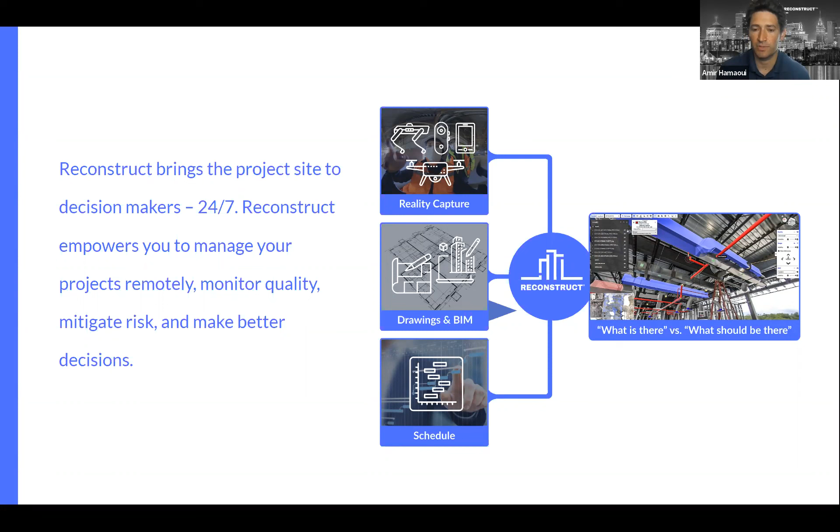But today we're going to be focused on multi-site construction, meaning there are many of a similar type of project. If you think of retail or store development, whether for the restaurant industry or various other retail, this is what we're talking about.

So we're going to talk a lot about the project life cycle today and break it down into the 5 key phases: plan, design, construct, commission, and operate.

So for each one of these, when you think about the planning phase, what's beneficial? Really, you want to understand your site, whether it's a greenfield or a brownfield, and whether or not you can get there—having a virtual walkthrough of that, or understanding what your facility has before you get started, is pretty important.

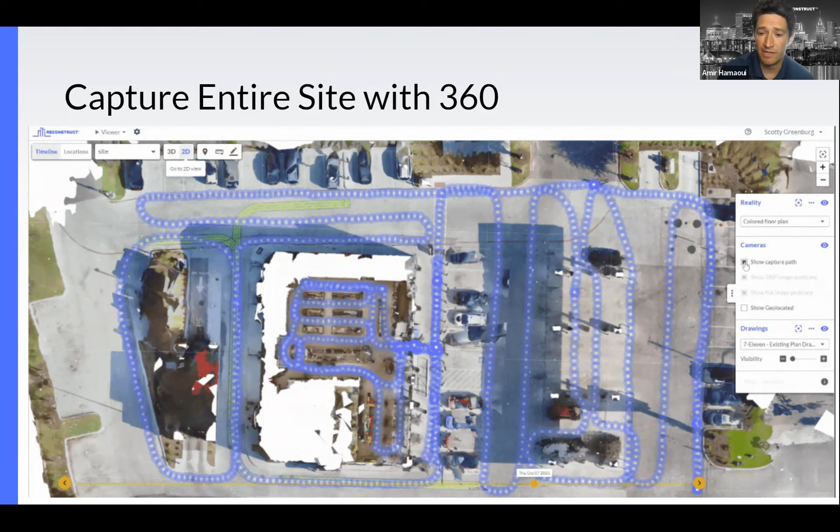So with 360, you're able to walk the entire site and capture everything, indoors and outdoors, and then create a reality map of that to understand the full site layout. Now, a capture of this size probably takes about an hour or so to walk all of it. But what you see here on your screen will be available for everyone later that day, including all of the imagery. Now, what can you do with this?

Essentially, these are measurable models because Reconstruct is creating a model from it. And you can measure up to sub-inch accuracy with 360 cameras. And this is useful because there may be things that there aren't any design drawings for, or you may just have photographs that in and of themselves would be just pictures. But here you can do measurability.

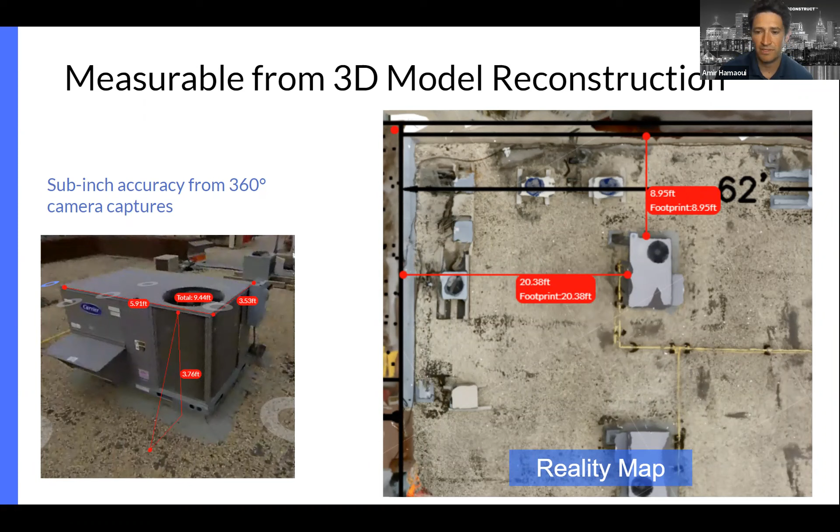From distances left to right, and you can also measure in 3D. So that HVAC unit on the left-hand side here, you can see you can measure the base, the width, and the height to understand the overall size of your particular units and where they're located and all of the hookups for it, to really assess whether or not this unit needs replacement, whether it's old.

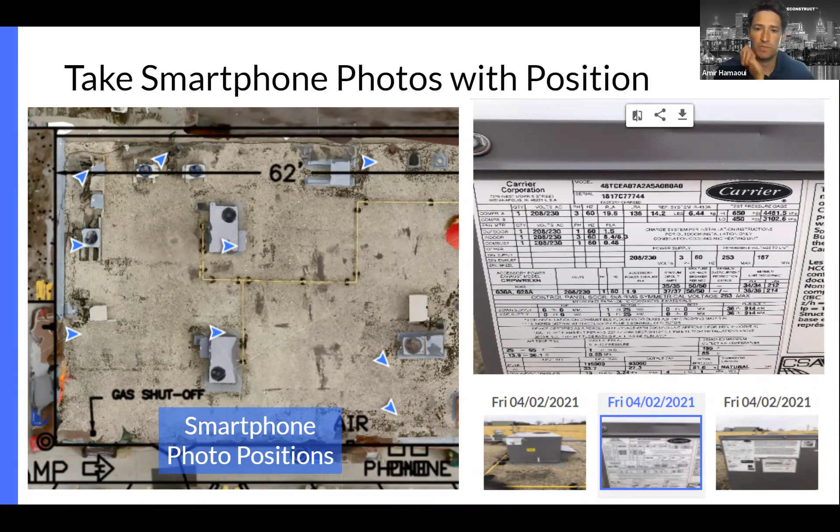But using traditional methods, you may go out and snap a few photos. So this is still applicable, but we don't just use those photos and store them on a hard drive. You're able to place where they were taken. So on the left, you see these triangle images indicating where they were taken. But you also have the dates that they were taken as well, along with the close-ups of all the details. So when you do a facility assessment, there's various areas that need specific focus, and this is another way to do that.

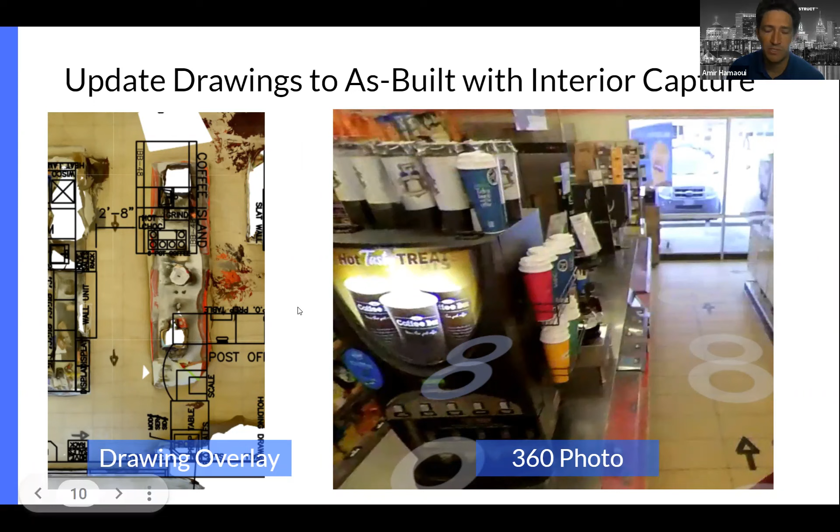And so they went in essentially to quickly do a capture in less than an hour of the whole site in order to go update all their drawings so that they can understand what kind of future work would need to be done and to bring this store up to its current standards. So the real takeaway here is that you can capture and share within minutes to effectively plan and have an overall complete view of your site.

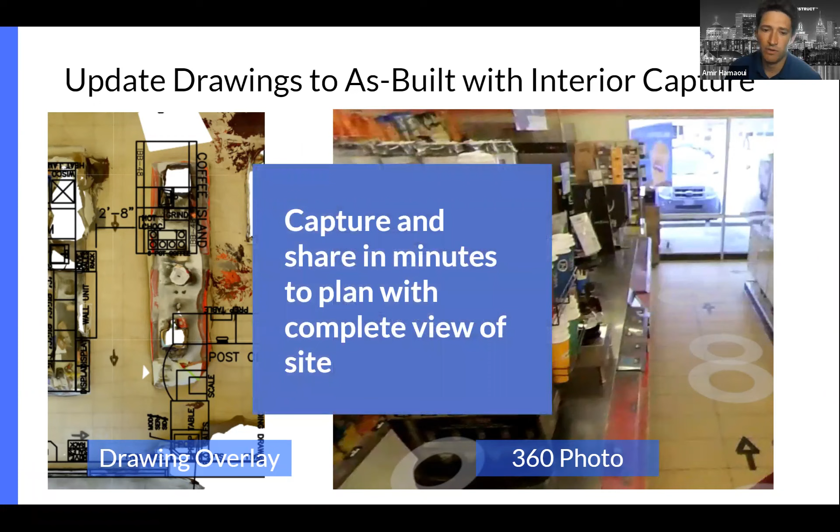Hi, everyone. As Amir mentioned, there are typically two scenarios for development. It could either happen for new construction where the existing field needs to be integrated into the site conditions, or it could be a renovation of the existing property or upgrades that need to happen. That's where Reconstruct comes in handy for scanning the space, which can later be converted into BIM.

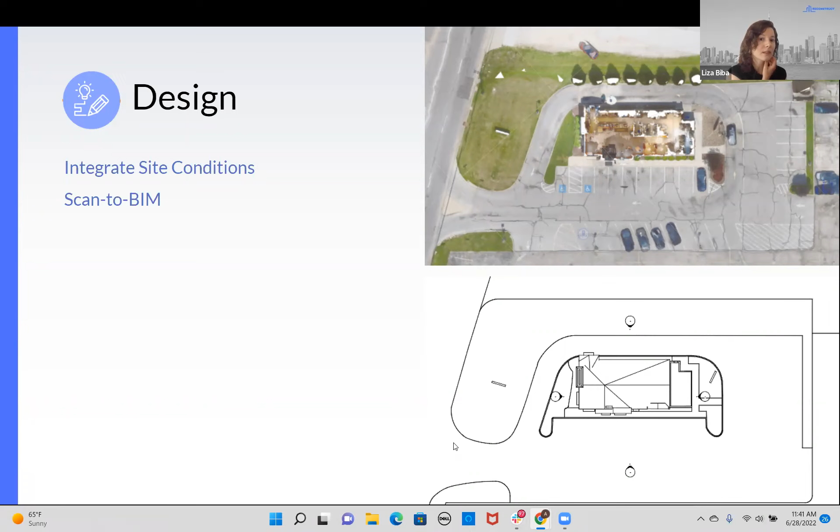We can go on the next slide through the potential workflows and examples. If you could click on the next slide. Thank you.

Right here on the right-hand side, you can see the potential workflows. It starts with a capture of the space, existing building or space, that using Reconstruct can be converted into the reality model. Later, that reality model, shown in the center, can be converted into a BIM model that designers can build using the point cloud model we generate from the videos, 360 videos. Or it can go the other way, bottom up: the BIM model can be created to build a building, and then we can do the capture of the existing space that was built using the BIM model and generate the actual images.

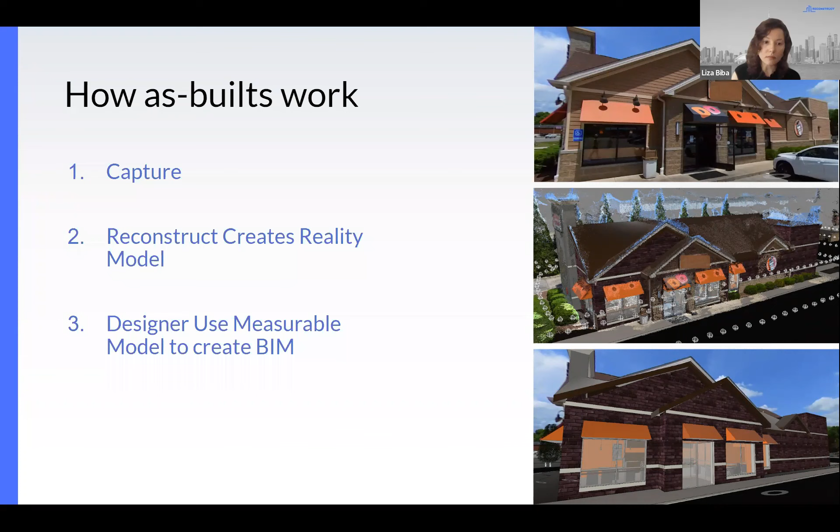On the next slide, you can see an example of generating plan views using the BIM models. For example, somebody goes to the existing building, does the capture, generates the 3D point cloud model that was used for the creation of the BIM model. And that BIM model is used to create plan views.

Later, we can use plan views to overlay with the point cloud that's generated and the 2D ortho that's been generated, to verify the conditions and make sure everything is right.

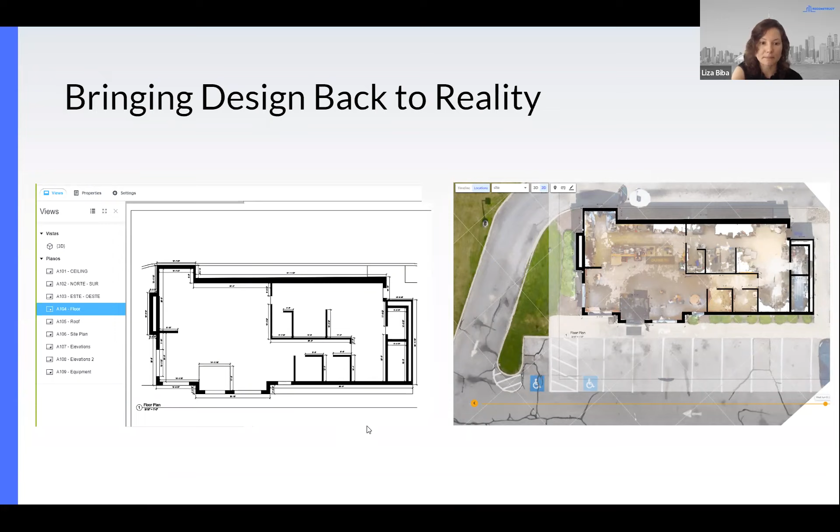Reconstruct always tries to listen to our customers' feedback, and several users love the reality floor maps and wanted to look up. The next beta feature allows us to create similar orthos for the ceiling.

Here's one example. The drawing was created from the 3D BIM model that was created from the reality model, and the drawing was then validated by overlaying it with the reality ortho.

However, these drawings can be created from the 2D ortho directly if that's preferred. The takeaway here is that the reality model can be used as a baseline for design.

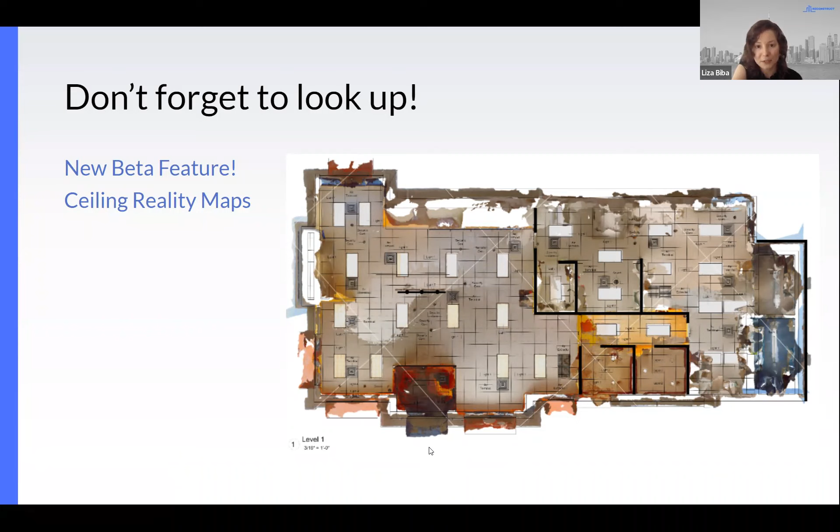Well, after the design is done, it's time for construction. For multi-site projects, construction could be happening simultaneously at different parts of the continent or even the planet. It's challenging to be in person at all of those locations to monitor progress. This is when having access to all of the job sites on one platform could be very instrumental.

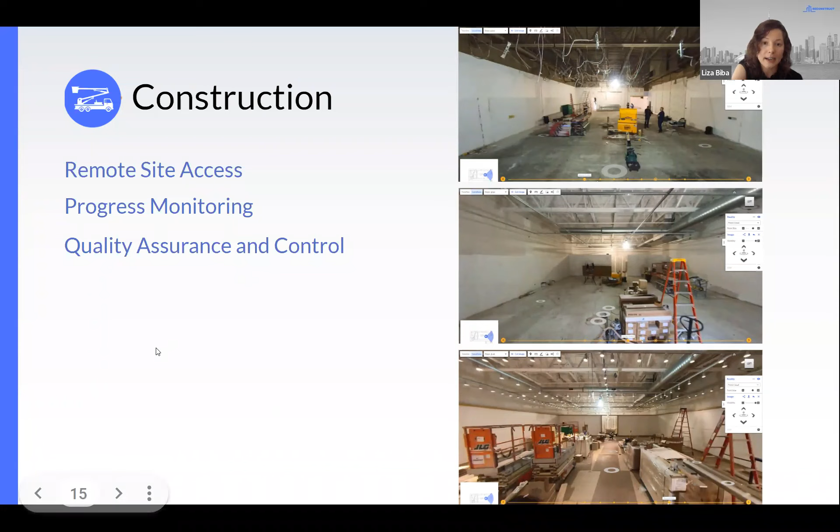It's instrumental in saving time and money. Reconstruct makes it easy to walk through the progress of the project without leaving your chair or your office space or wherever you're working from. From one video, the software can generate the point cloud 3D model of the space and an ortho plan view that can be easily overlaid with the design documents and shop drawings to verify the accuracy and completeness of the construction project. On the next slide, I can go through some examples.

Here, for example, is the reflected ceiling plan of the space that was overlaid with the ceiling ortho plan generated from the 360 video captured on site. We can quickly and easily assess the ductwork installation and verify it against the plan. We can see that in this specific situation, there was a slight deviation from the design, probably two feet off, but having ortho plans, you can later generate as-built drawings.

In my experience, doing this kind of assessment out in the field was a bit more challenging. I would have to make sure I have my iPad with all the drawings loaded, or have my drawings printed out, and have my measuring tape ready to measure everything. But with Reconstruct, you can just walk the site with the camera, capture everything, go back to your desk, and see right there where the elements are located, making sure they're in the right place.

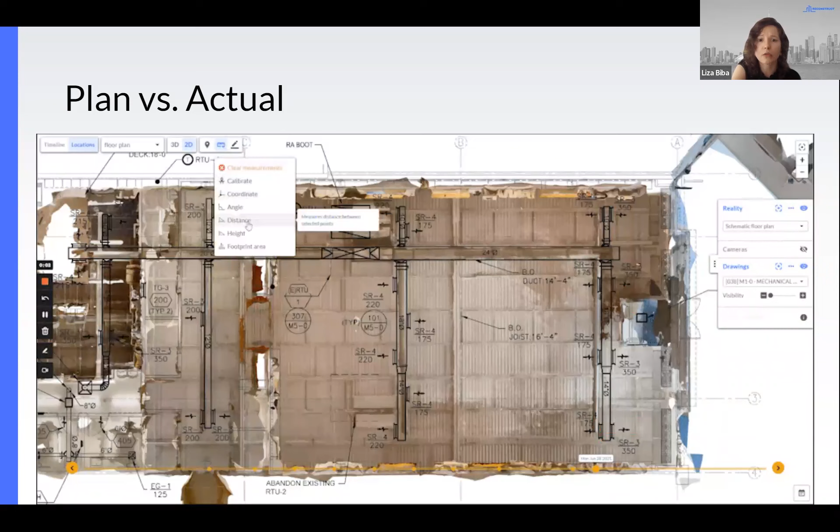On the next slide, we can go over the next example. Here's the overlay of the roof. You can see that the walking pads, when you go over the plan, were not that well visible, even though they were shown on the plan view.

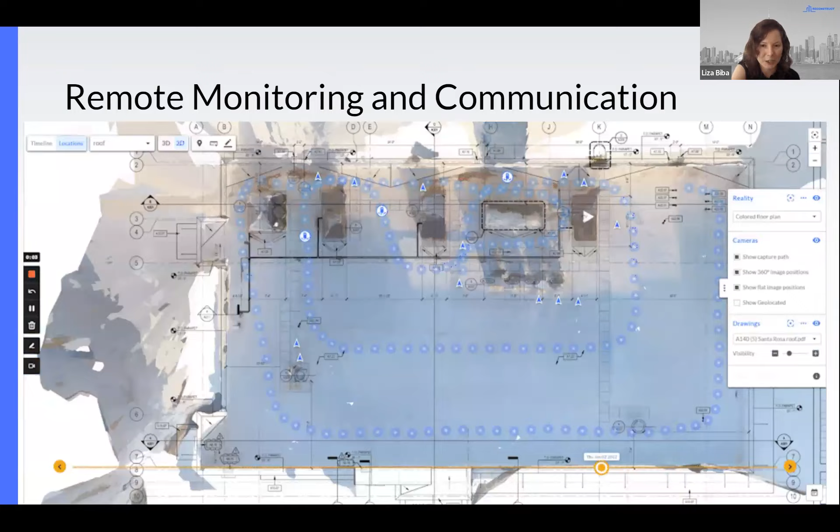So in order to take a closer look, you can click on the camera and open the photo of that space to verify - oh yeah, the walking pads were actually installed, but they didn't seem to adhere properly to the roof. So you'd want to make sure your team is aware of this, and you can use our markup tool to notify the team.

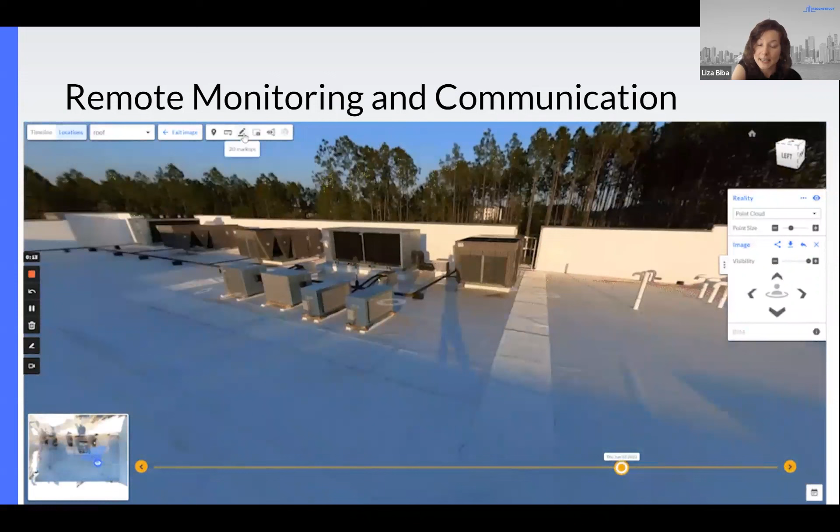You can highlight, paint on there, add notes that you can later text or email to your team members. The takeaway here is that Reconstruct makes it really easy to share the project with anyone, and it helps improve communication and transparency of the construction process.

Once construction is close to completion, it's time for the commissioning process, which is the process of assuring that all of the systems and components of buildings are designed, installed, tested, operated, and maintained according to the operational requirements of the owner or final client. Reconstruct allows you to create a punch list and document as-built conditions before the space gets occupied and starts operating.

On the next slide, I can go over some examples of how this can be taken care of. In my past experience, creating punch lists would require some prep work - I'd have to make sure all my drawings are arranged and ready, downloaded on my iPad or printed, so I can walk the site and make markups and create punch lists.

In this case, you don't even need to travel to the job site. You can just walk through the job site virtually and create punch lists right here, with access anytime, walking through the job site, creating points and pins with descriptions of what's wrong.

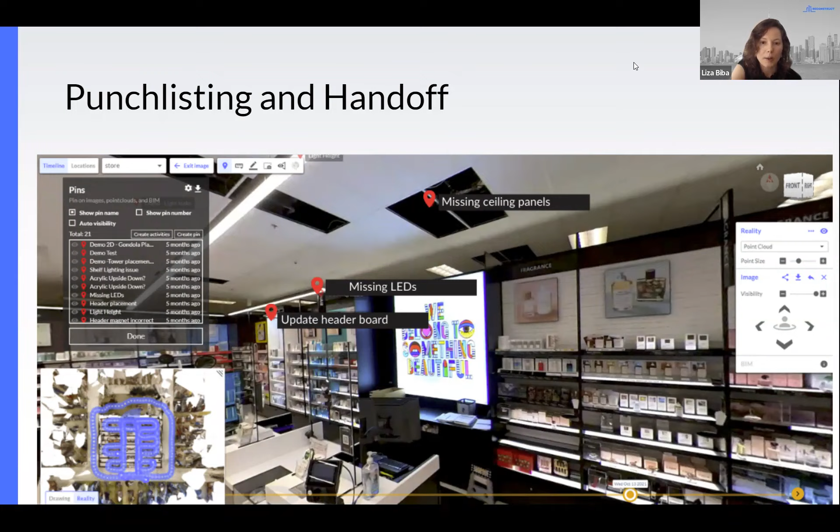On the next slide, we have a specific example where the vice president of construction of a retail chain was reviewing, or virtually walking through, several projects in the US that were ready to be commissioned. He wanted to make sure that the signage looked good, that adherence to brand standards was happening, and that the project was ready to be signed off.

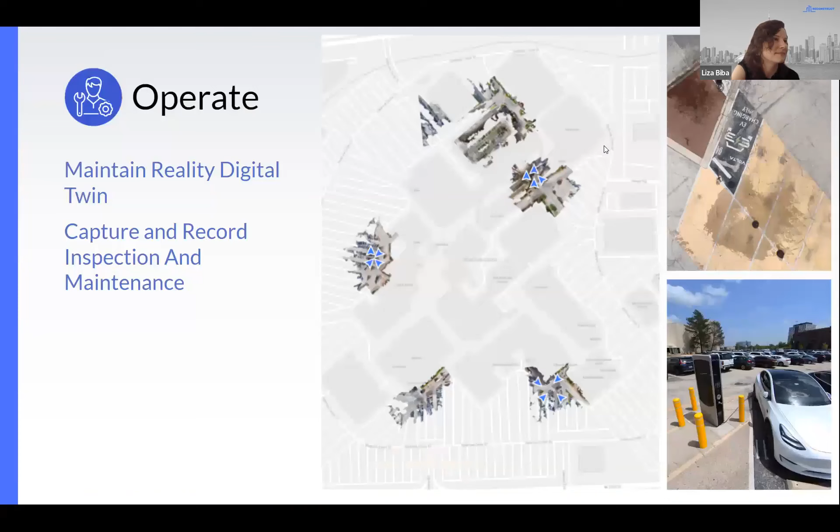Thanks, Liza. I appreciate you going through the core section of the project lifecycle there. So I'll finish this off by talking about the operation phase.

Now, when we're talking about multi-site, you may be thinking of a 7-Eleven here, a McDonald's there, all over the nation. But multi-site can also mean that you have many little projects within the same larger mega project.

Here we're looking at some EV stations where there's 5 different stations at a particular mall. This is very useful because you can essentially go out - each one takes less than 5 minutes to capture - and place all 5 of them on a map, then review it. For this one, still photos were taken, some 360, and a bit of inspection work as well.

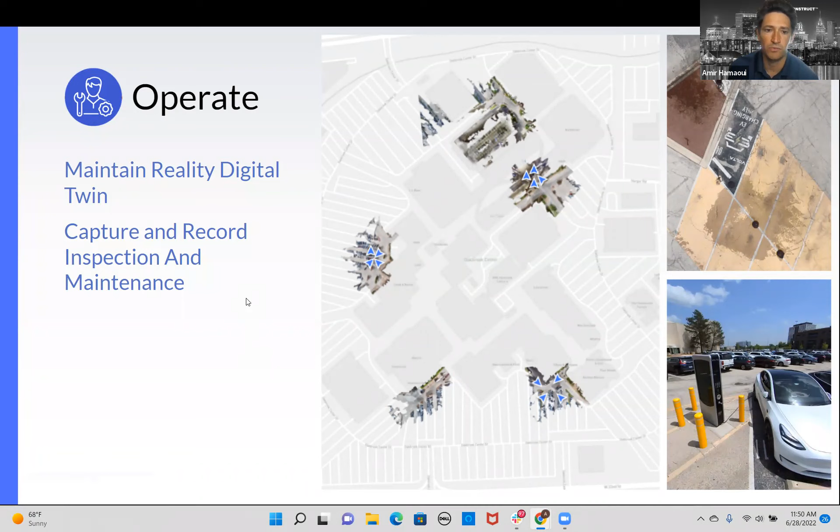So this operation phase has a lot of different ways to think about it, but essentially the owner wants to maintain their asset for whoever the customers are who are going to go to it. So one kind of phase has to do with maintenance, and this may happen routinely as part of any process to make sure things are going on.

But where Reconstruct can add value is to have a full visualization of all the changes that may happen over time. Here you see two images. One is before it was fully opened, and commissioning was not complete because the painting on the parking spots hasn't been completed yet, even though the equipment has been installed. Then later in the year, when the sun is shining and the trees are starting to bloom, you can see that this is fully occupied and operational.

So any unit may need regular maintenance, or it could get damaged for one reason or another. If it does need to be fixed, if there's any sort of sensor that says we need to go check this out, you can send someone on site. But when they do that maintenance, you can have a full recording of everything that took place. Most likely people are already taking images, which is expected, but having that spatially oriented along with all the other stations is where you'll really get additional value.

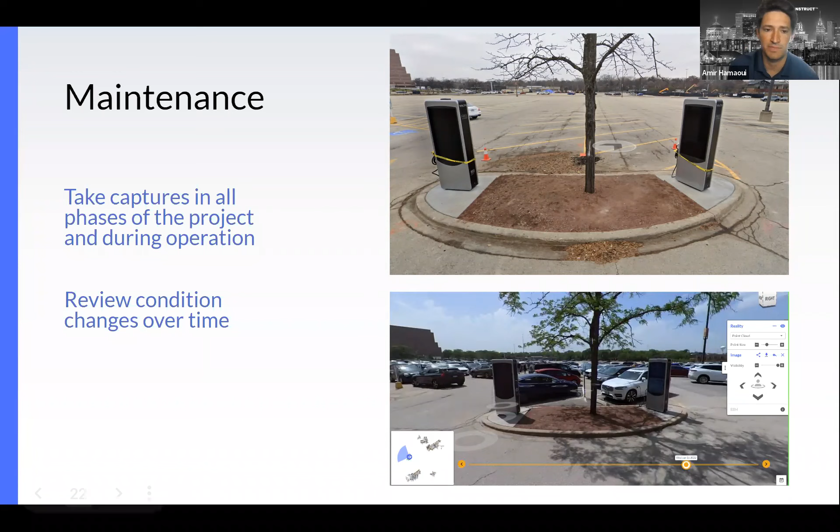Talking a little more about inspection, the inspections don't necessarily have to happen by inspectors. You can just send someone out to do a capture, and then have that be a remote inspection. So you could do these inspections virtually. And sometimes you may not need to get into places that don't have typical captures.

A lot of time people compare 360 images to Google Street View, especially when you see these, they look very familiar. But Google Street View cars don't go around all the time. So your company, or anyone, can go out and do these captures and capture spaces that you may not have that free kind of service to leverage on. Here you can see both indoors and outdoors of a particular space with some markups.

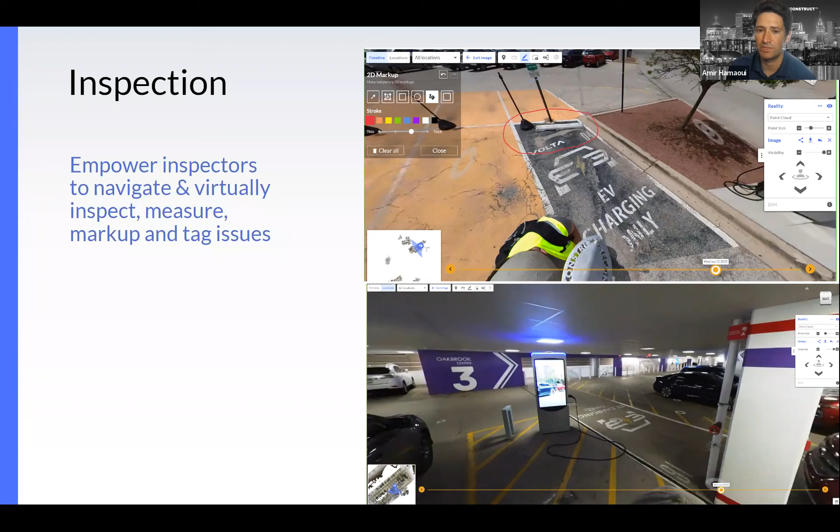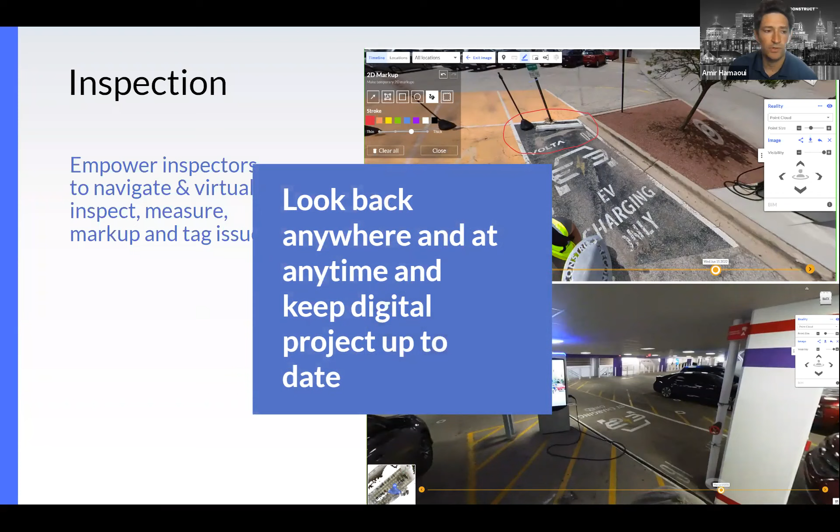So the takeaway here for operation and maintenance: if you use Reconstruct through the entire project lifecycle, you are able to go back anywhere at any time. And as you move forward in the operation phase, you're able to keep that digital version of your project up to date.

All right, so let's recap here. When you think about the project lifecycle and how Reconstruct can add value, you can think about the Reconstruct project lifecycle. In our customer success team, where we see Liza as one of our CSMs, we always start off our projects thinking about how we're going to add value to a process that's in place for projects throughout the life cycle. So just to recap, on the planning phase, go out and capture and understand what's there.

So that you can then enter into the design phase and leverage that reality model, either as a baseline for your design or to understand how your design is going to fit into your existing site. On the construction side, in addition to progress monitoring, quality control, and these other key workflows, what I've observed is just the ability to share the project with everybody and improve communication and transparency goes a really long way.

Because everyone has a different perspective. They come from different backgrounds. They look at assets in different ways depending on their area of expertise. So delivering the model to everybody has a lot of value here.

We talked about commissioning, creating punch lists, and being able to validate those remotely. And then of course, ending up here, having your complete view of your project with the full time history from anywhere, at any time, allows you to really have a good operational model. And there's more nuances, more details, than we can cover in all of this stuff.